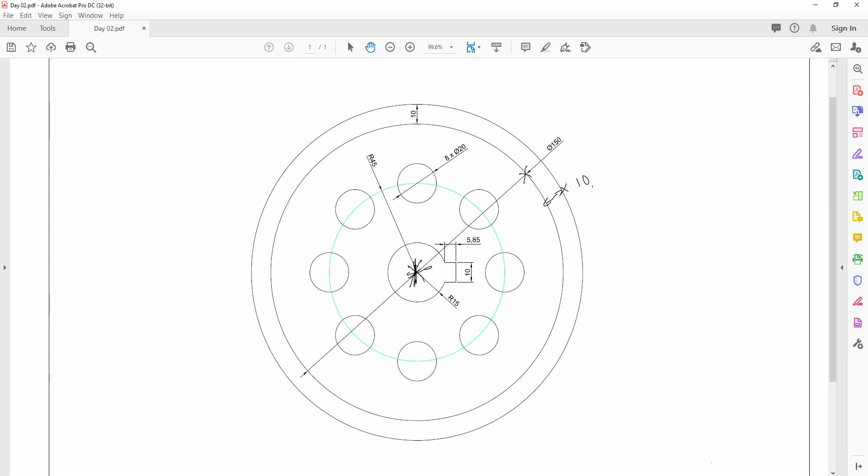So from center to edge, obviously we know that we have a diameter there of 150, or 75 radius. From that point to here, obviously we know that then we had a further 10, so 160 diameter overall, or 170 if you include obviously both sides.

Then with this little guy here, which was a pitch circle diameter or PCD from the center, which then gave us all the center points for these little array holes here. Remember, they were equally spaced. There's 8 of them, 20mm in diameter. The last one is then we had this little kind of keyway.

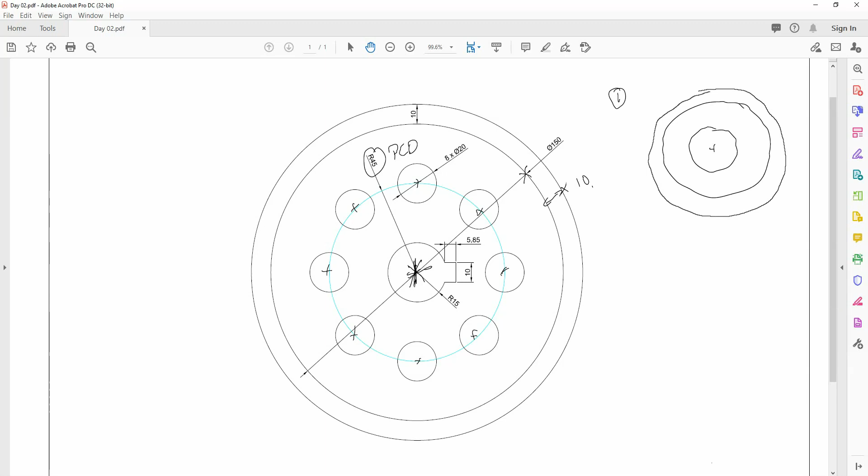So again, if we run through the steps, the first thing to really do is to pick a start circle. So I would have chosen a big 150 with my center point in the center. Then you could have done either the offset, or you could have gone into maybe doing the array first. So again, you could have maybe pitched off your offset, which would have given you the bigger circle. Okay, then you could have maybe done your vision circle, which would have done for your offset, and your PCD.

And then you could have again gone around and put the array on, for your 8 holes. What I would have done last is, because it's nice and straightforward, is last one then you do obviously is put all of your holes in. So then you put the circle in, and then you'd obviously use the line tool to put your keyway in and trim out that middle line. That's the easiest way to do this particular drawing.

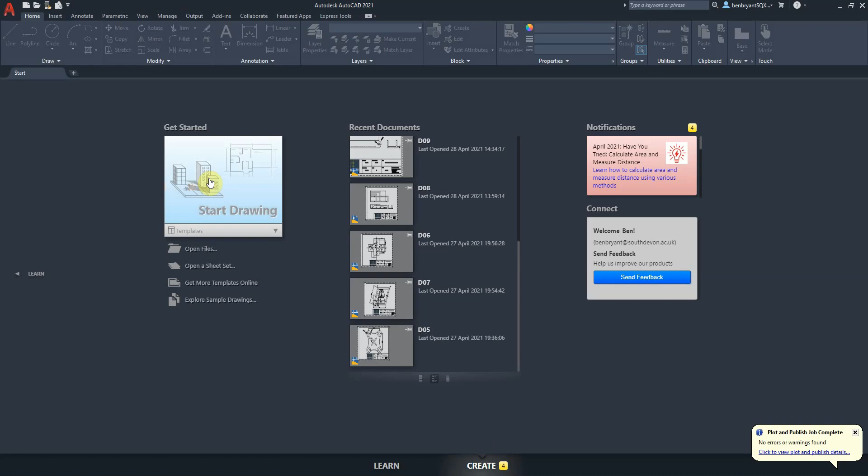So let's run through it. Into AutoCAD, okay, I've chosen my template, so I'm going to go to the start. Now yesterday I sort of shown you how you draw the page and make sure that your drawing will be in the center of that area, and then when you come into the page border, it's all well and good.

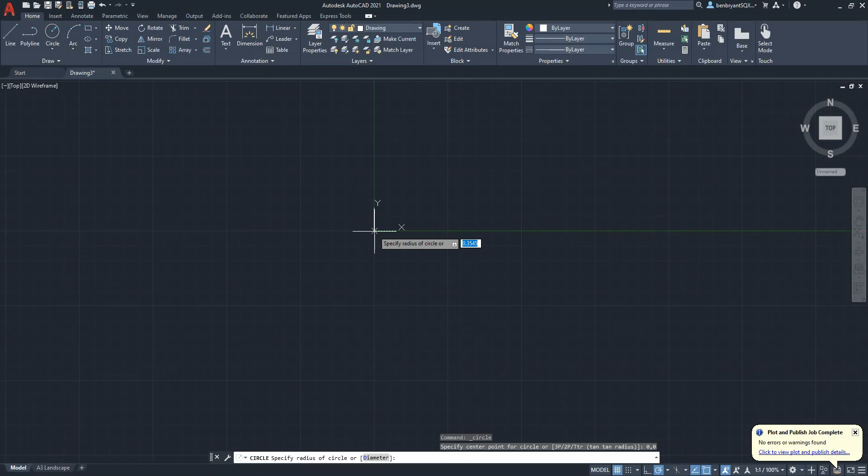Today we're going to do it a little bit differently. I'm actually going to use this X and Y and the center zone to my advantage. So the first thing I'm going to do is I'm just going to draw my 150, okay, from the 0,0 point. So it's asked me to specify the radius of a circle.

Now if I put D in, okay, lowercase or capital, it doesn't matter. If you look down the bottom, okay, down here, it says that I can specify the diameter. So I can even click this, or I can put D and press enter. That changes my mode from a radius circle into a diameter. So I'm putting diameter 150, enter button to accept.

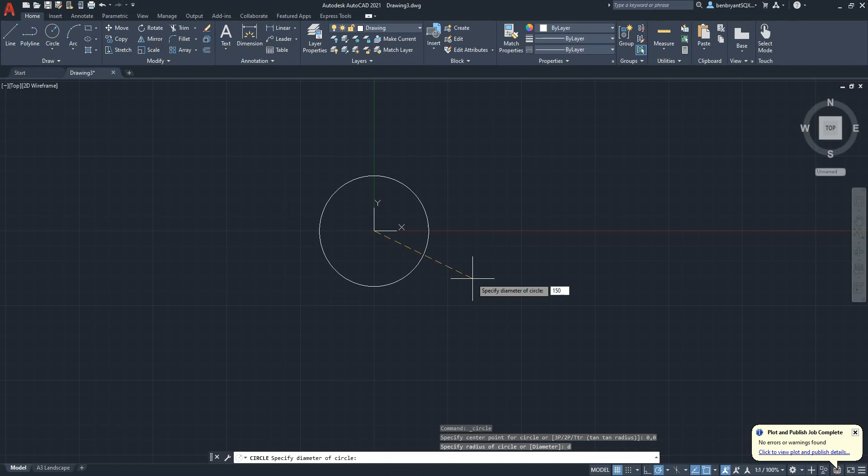Then I'm going to come in and do the offset command. So I can either put offset as one word, or I can actually put an O. So O is like a hotkey on the command. Okay, and I want to specify 10mm, I'm going to click the circle. Now offset will work 2 ways. If I come into the circle and make it 10mm smaller, okay, if you go outside the circle, 10mm bigger. So I want to make sure I'm out of the circle. Once I'm out of the circle, click to accept.

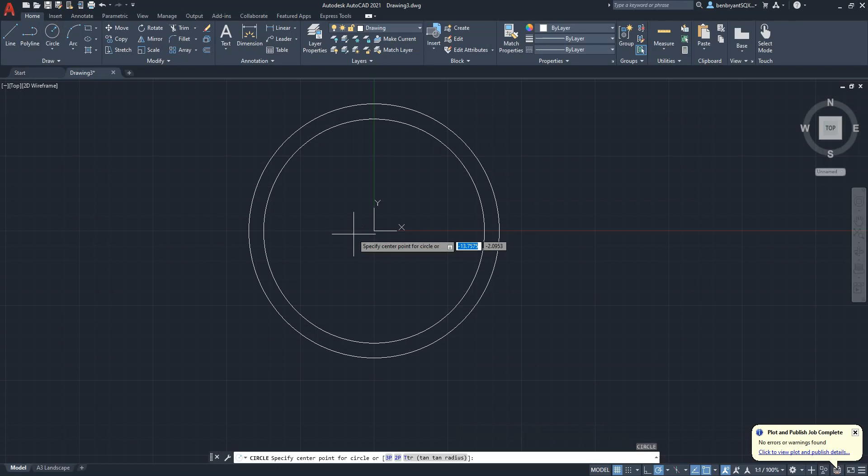So now I need a pitch circle diameter again, but I've got a radius number, so I've got to make sure that I'm in the radius circle. So I need to see again, okay, I'm just going to read the bottom, make sure I'm still in the radius. So specify center point, middle again, so 0,0. Okay, don't try and click that middle bit, because you'll probably end up being slightly off. So the radius of this one is 45. Okay, so it's a PCD, pitch circle diameter. The actual dimension is specified within a radius.

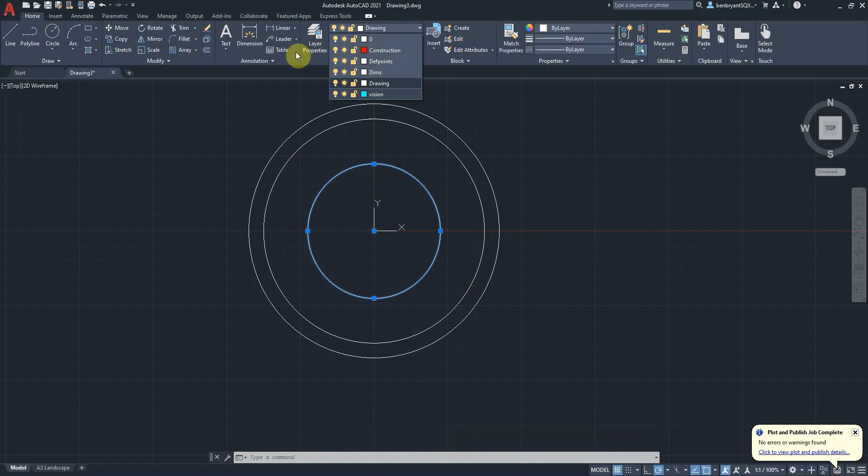So I just have something called a vision layer, which you can create. Just go into layer properties, and then you can obviously just make a new layer. Again, if you watched the video, that was where it's all been explained before. So into vision, okay, I'm just going to turn that one into a vision area, because then it just means it's not a critical part of my drawing. It just shows that that's where the array is. Okay, now I'm going to come to circle diameter.

I'm actually going to select it this time rather than using the hotkey, and I'm going to latch onto that quadrant up the top - it's like a snap point. I'm going to zoom in and show you a bit easier there.

If you don't have that quadrant available and it's not snapping at any point, come down to the snap function. First thing to do, make sure Osnap is turned on - is it highlighted down here? So either F3 or Osnap on the command. Then you can choose whatever ones you want. I generally just have these on by default because I haven't turned them off before, but I normally have endpoint, midpoint, centers, nodes, quadrants.

So obviously I need to make sure quadrant is turned on. If it's unticked like it is now, it means it's not available - you just need to tick it. Or you can come in and type Osnap, and the first one will come up and give you this nice little window, and you can select the ones that you want.

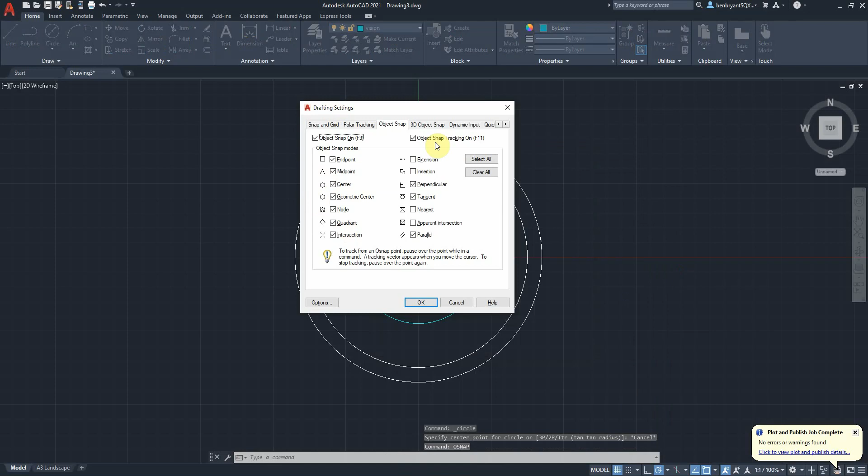So, circle diameter - I'm going to choose the center point for my circle, specify the diameter, so diameter 20. I'm going to change that to my drawing, I just didn't select my layer property beforehand.

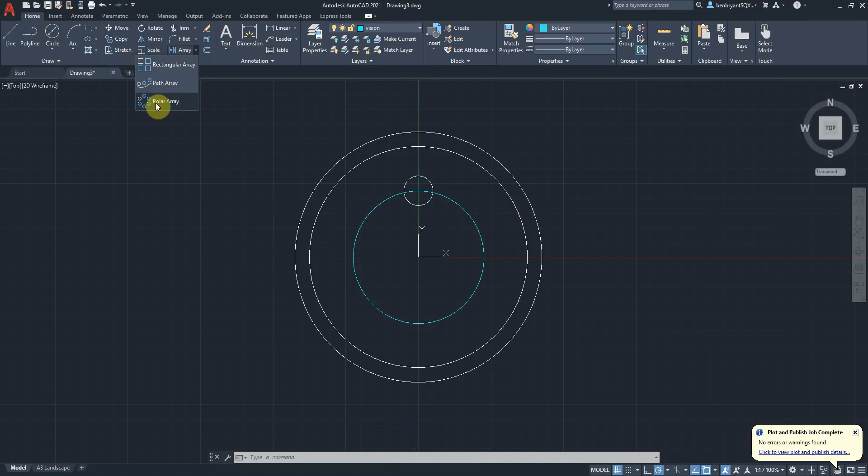Then we're going to come into array - see the array function here, drop down the array tab. I want polar array rather than the rectangle that's currently shown. Polar array will do it around a center point, path array will do it across a path or a line or an arc or whatever way you want, and rectangular array will do it along two columns or two points, filling like a rectangle essentially.

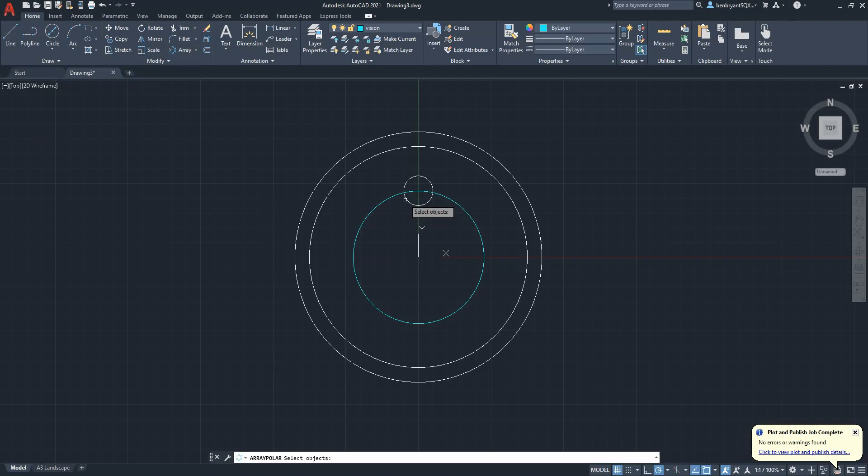So polar array - it wants me to select the object, which I've got, then choose the center point, I'm just going to do 0,0. Then it shows me the actual type, so I can change that, and I need 8 of them, so 8 lots of 20 - 8 items.

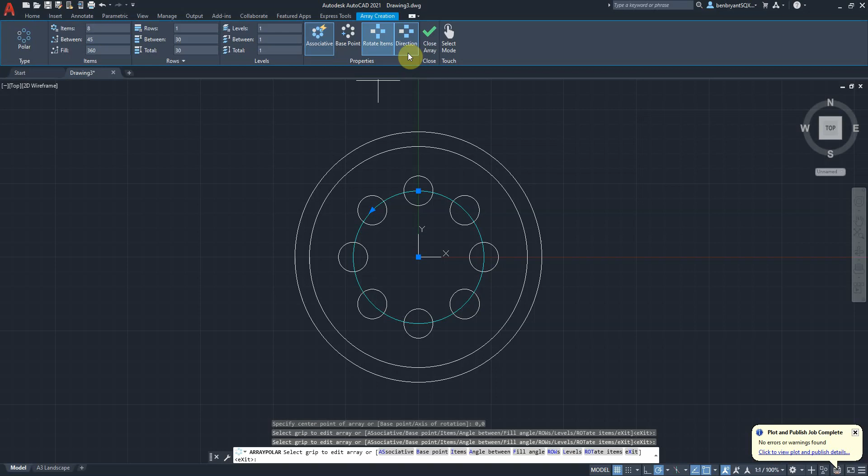Just going to come off - so it should say it's 45 between 360, so they're all equally spaced. I could change the base point or rotate them if I wanted, but I'm happy with that selection, so I'm going to click OK.

So there we go - there's our 150, our 10mm offset, our polar array.

Last thing to do, back into circle radius - 0,0, and I want my R15. I'm going to zoom in, change that to my drawing, because I haven't come off of that mode again. Remember, every time you come off of it, it will go back, so you've got to make sure you override it that way.

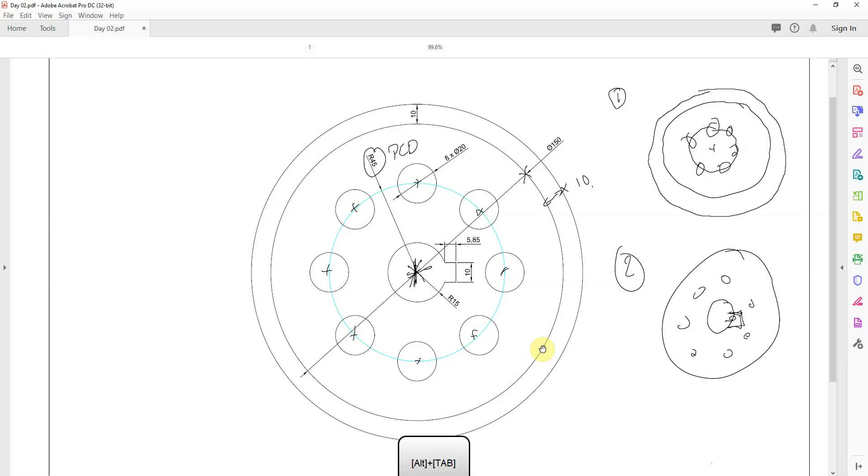Now I'm going to do a construction line. I'm going to come off the 0,0 mark, just come along like so. Now I need to basically put this 5.85 in, and put this 10 in.

So I've got a halfway line, I'm just going to offset 5, go 5 above. Then I sort of need a line to come out, so I'm actually going to draw a line on that quadrant there up top.

Back into offset, now I'm going to do 5.85 and choose that line. That's now 5.85 along, so I've got like a mini sort of grid.

On my drawing, I'm going to come up to the points and just over-sketch, and what I'm going to do is come into the circle, like so.

Now I'm going to come into trim - trim either lives in this location here, or it's TR for shortcut, or TRIM, whatever you want to do. Enter that, and what I'm now going to do is trim out everything that's off my construction line. So I'm going to turn my construction lines off so I don't delete any of those.

So on AutoCAD 2020, 2021 or 2022, when you come on trim, you can select anything that intersects and it will remove that part, like so. Anything prior to 2020, so 2019 backwards, you have to select the object, select the two objects, press enter, and then click the part that you want to remove.

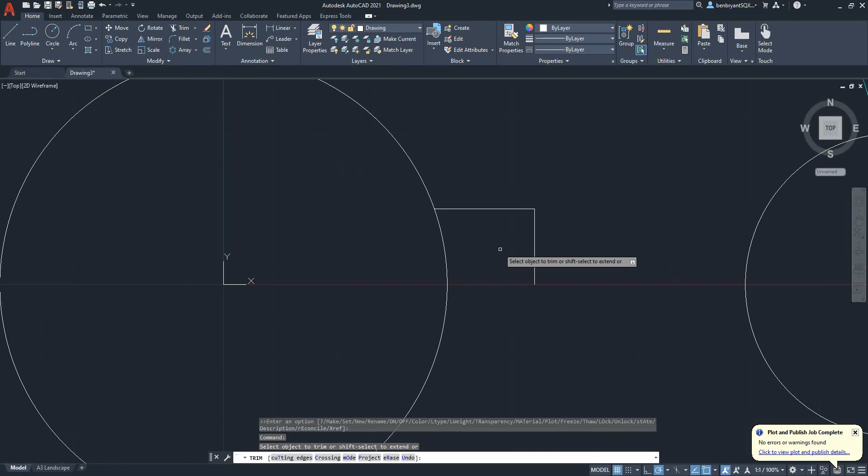Okay, so that's now my top half of the keyway. I've got it trimmed. What I'm going to do now is introduce a new tool.

I'm going to use the mirror function, using this horizontal line and this vertical line. Enter to accept into the system. Choose the snap point, and I'm just going to go along to this point here. Click another point on that horizontal line. Erase the original source - I want to keep it. Okay, now I've mirrored my second part of that keyway.

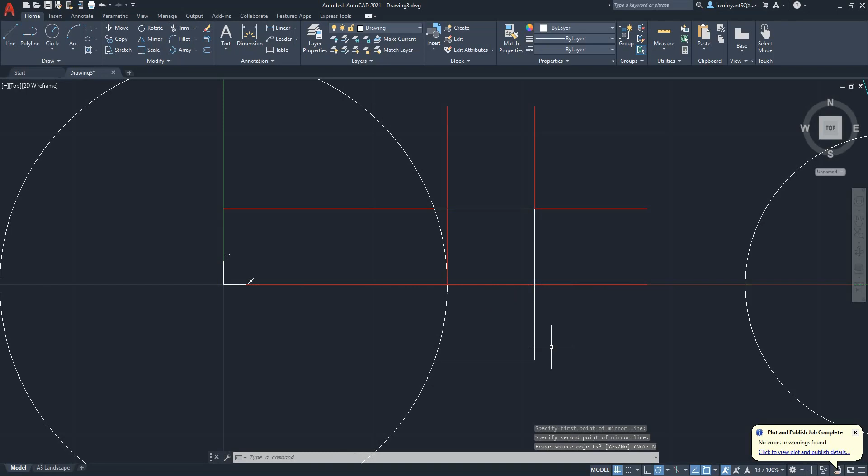That's what I'm going to do, turn it off, back into trim. I'm just going to trim out that circle, like so, enter, escape to cancel. There is my nice little keyway.

Last thing to do is, if you go to annotate and use the dimension tools there, or use it on the home screen. I want to do my diameter, so I'm going to come off like so, to keep it nice and uniform.

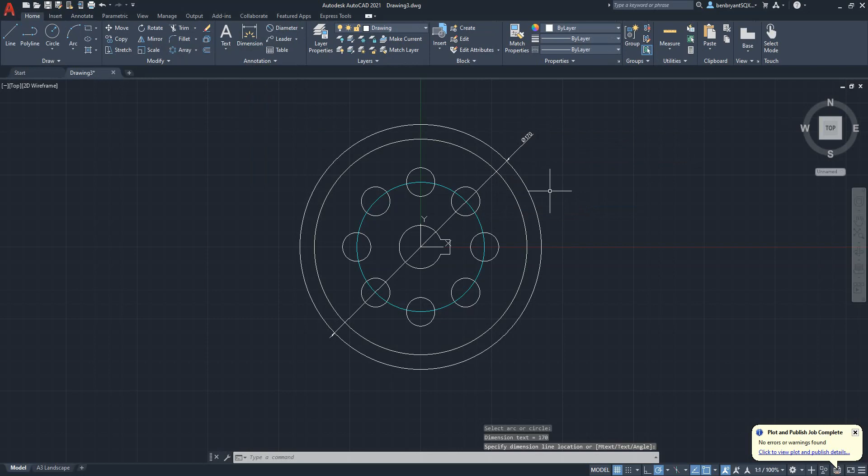It's 170. Space key to put the next 150. If I wanted to, I could do it like before and do the offset, so I could just do point to point like so, as well, so I wouldn't actually need to put 170 in then.

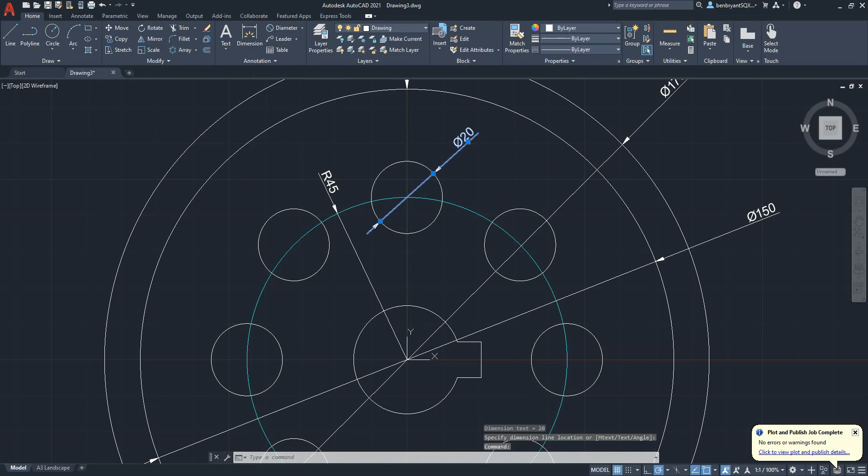I'm going to put a radius in, of here, 45. I'm going to put my diameter in, which is there, which is 20. Now, you see on my one I put 8, so what you can actually do is edit these functions. I put 8 times, 20 diameter, and then tick that one off.

That's going to do, just going to come straight down the bottom now, put my other radius in, R15, and then the last one I'm going to do is just put my 2 linear dimensions in here. I'm actually going to go below here because I've got another line there, so it's going to get a bit messy.

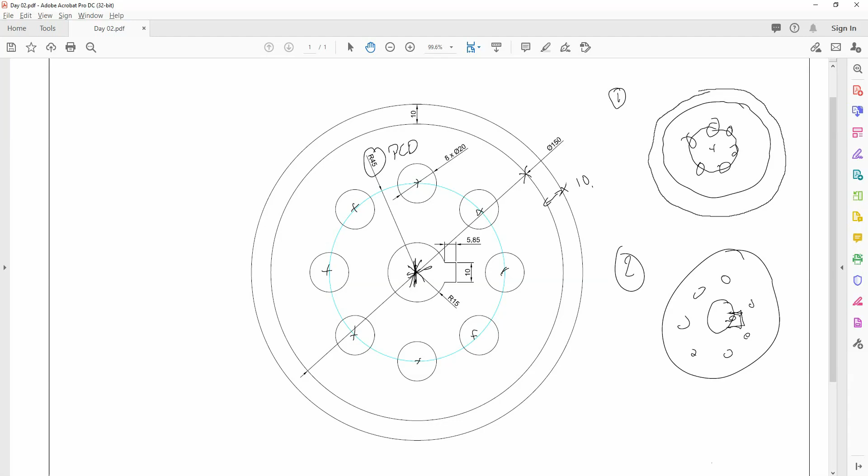Okay, like so. So there's my two. Now, if you look here, 5.85, okay, 6.71. So I've actually come out too far.

So what I'm going to do is a quick bit of editing now. It's because when I actually did those radiuses there, obviously what I've done is that it's only probably going to be 5 mil away rather than 5.85.

So what I'm going to do is quickly edit this. I need 5.85, so I have 2 options now: I can draw a line backwards, or I can bring the line forwards - it's entirely up to my choice. So what I need to do is bring back this element here, so I can stretch or lengthen, like so.

I'll just undo that, delete it, so I could stretch. Okay, and then when I've done that, all I have to do is I can either move this back and bring it forward. So I'm just going to remove that line here. Move that one. I'm going to do an offset of

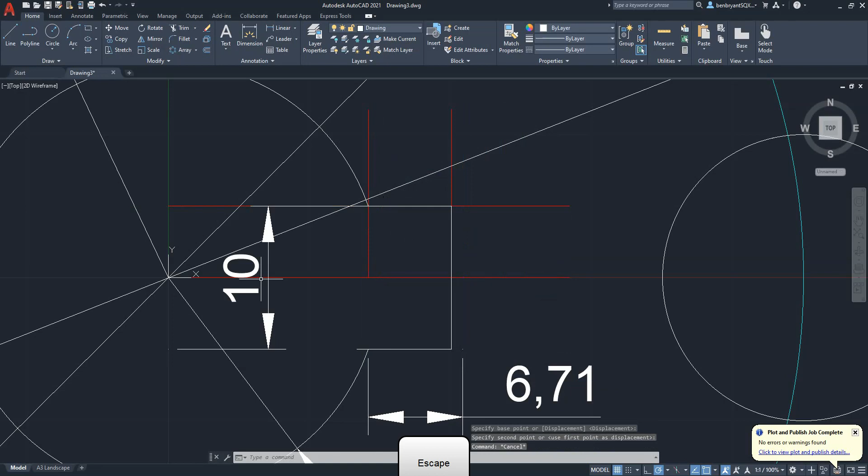5.85 from that line. Can I have both of those lines? I can come along, select those components, and I just want to do a simple move there to there. Just delete that dimension there, delete that dimension there, trim out again.

Okay, I could actually just shorten that line if I wanted to as well. Just click on the point, bring it back to the snap there. Okay, so just manipulated that.

Now I can come along, do another linear 5.85. I just obviously, okay, let's do it down the bottom. Give some lots of space.

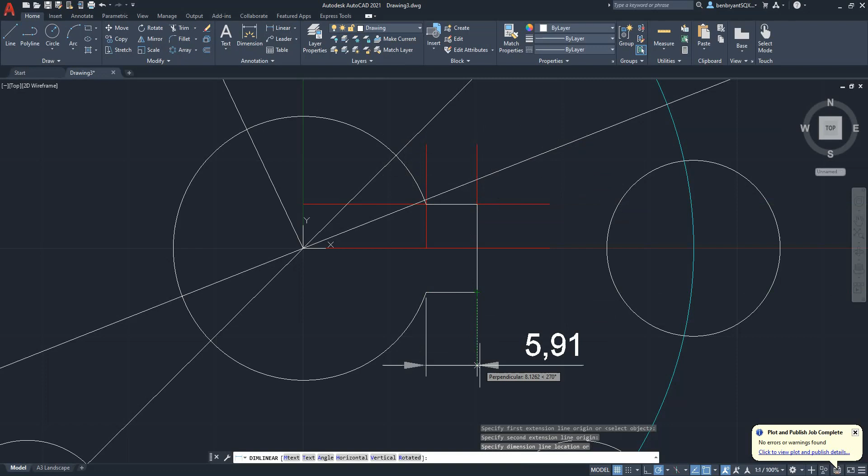Okay, let's just snap on again. So make sure you are right on that point of the snap, which I haven't obviously. So 5.85. I'm just going to select that one. It's just locking onto the wrong part there.

I'm just going to bring that dimension down, like so, and that's off my 10, which will go there.

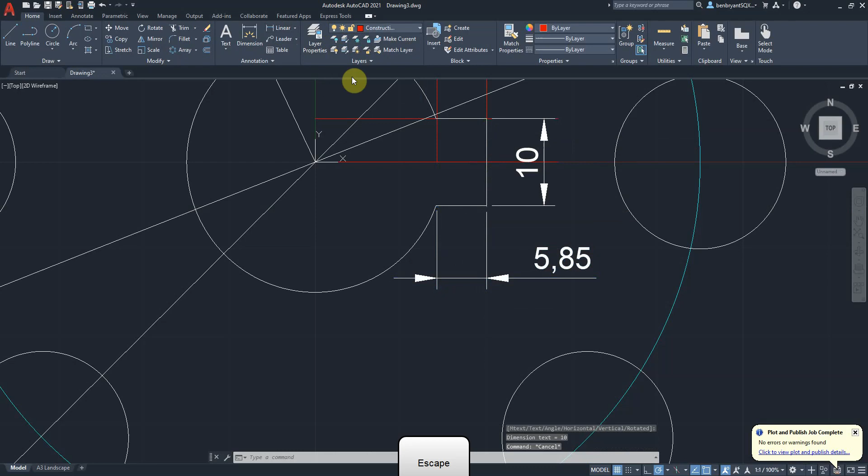Turn off my construction lines. Okay, like so. Turn off. There we have it. Now it's just into your border.

Okay, you're going to come in, double click the area, position. I could do one to one. Make sure I'm happy, and I'm going to go straight into my export.

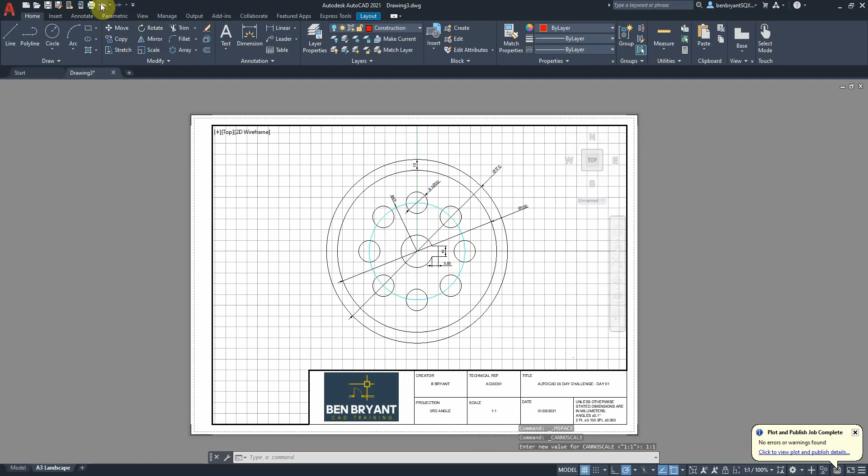Okay, saved all the details from last time. It's running A3. I'm going to put it on my desktop - something easy for me to find. Challenge 02 is now complete.